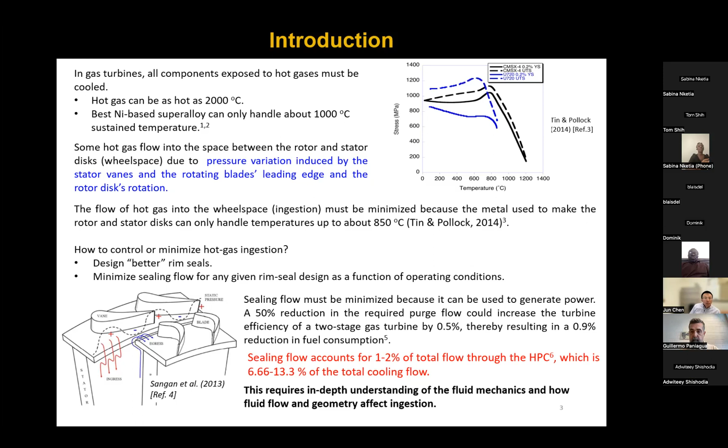To reduce sealing flow and also reduce hot gas ingestion, we need to be able to design better rim seals. That is the place where ingress occurs, the connection between the stator disk and the rotor disk. To design better rim seals, we need to understand the fluid mechanics and geometry, the flow mechanisms of how things go into the seal.

Ingress is induced by the rotor disk and its rotation, known as rotationally induced ingress, and by the pressure variation about the stator vane trailing edge, which is part of externally induced ingress, and also by oscillations in the stagnation pressure created by the rotating blades. Today I'll be talking about rotationally induced ingress and the pressure variation about the stator vane trailing edge, which is part of externally induced ingress.

For both rotationally induced ingress and externally induced ingress, a lot of experimental and computational work has been done, which I show in the Venn diagram.

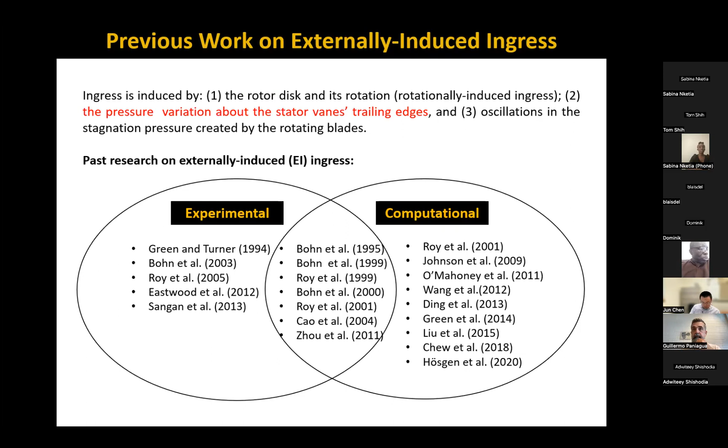From the literature review, several non-dimensional parameters were seen, but the most interesting ones are the non-dimensional sealing flow rate, CW, the Reynolds number in the annulus which depends on the annulus hydraulic diameter, the external Reynolds number which also depends on the radius of the hub R0, the rotational Reynolds number, and the ratio of the external Reynolds number to the rotational Reynolds number. All these parameters are varied to see how they affect the coefficient of pressure on the stator platform, known as CP, which has been said to be a predictor of ingress, and the sealing effectiveness, which is how well the seal prevents hot gas ingestion. There are some parameters I think are key here, but I'll talk about them later on.

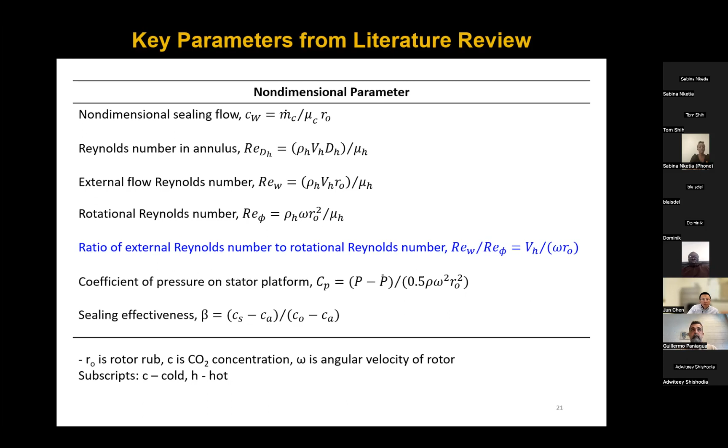So the following was noted from the literature: when REW, the ratio of the external Reynolds number to the rotational Reynolds number, is much less than 1, it means the flow is rotationally dominated, meaning the ingress is dominated by the rotation.

But when it's greater than or equal to 1, then it means that it is dominated by external influence, that's the stator vanes and other things that are not part of rotation.

So far, benchmark quality data has been generated that can be used to validate CFD. That is from Green et al. in Ohio State University, or from Sangan et al. at Bath. But they focused on generating high quality data and not so much on talking about the physics.

On IR ingress, Kelvin-Helmholtz instabilities has been identified by Rabs et al. in their 2009 study. However, how they occur and how they affect rotationally induced ingress was not explained. Also, alternating regions of high and low pressure have been identified by Green et al., but what causes these regions has never been identified.

On EI ingress, from the literature in Sangan et al., CP, or the coefficient of pressure, was deemed as the predictor of ingress, but we would want to verify this.

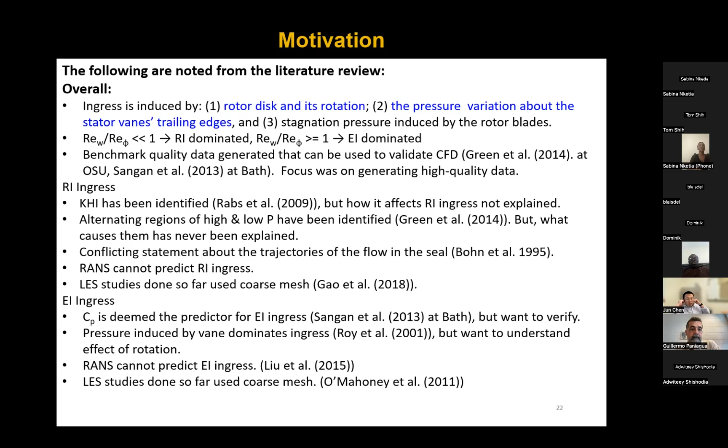Hence my objective is to examine the flow mechanism creating rotationally induced ingress in a Rotor-Stator configuration using wall-resolved LES. The approach would be to use a Rotor-Stator configuration without vanes and without blades.

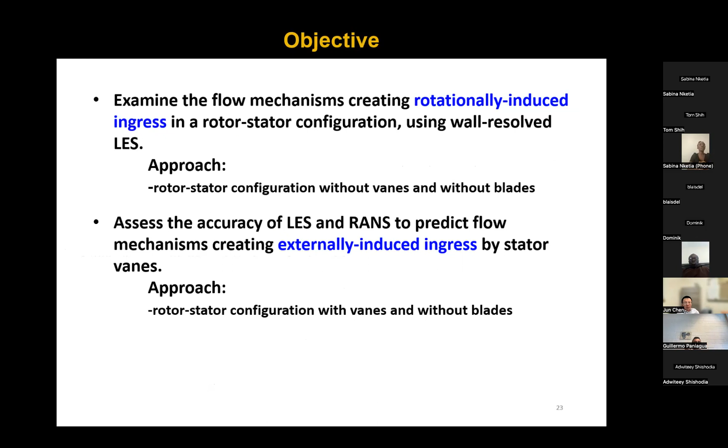The second objective is to assess the accuracy of LES and RANS to predict flow mechanisms creating externally induced ingress by stator vanes. Here, the approach would be to use a Rotor-Stator configuration with vanes and without blades.

So for my problem description, I'm going to, sorry, let me just move the chat somewhere.

So for my problem description, this is the configuration from the Aachen group, and this is the configuration studied for rotationally induced ingress. It has no vanes, and it has no blades.

Here we have the hot gas coming in at a hot temperature with a velocity profile, and it goes into this seal here, which is between the stator disc and the rotor disc. And then we have the outlet where there's a back pressure, and then we have an extension duct to prevent reverse flow.

And then at the bottom, we have the cooler flow coming into the seal at a cooler temperature. And then the red boundary is a rotor disc rotating at an RPM of 11,700 RPM, which is representative of aircraft engines.

Really. And so some of the key dimensions that I would like to note will be SC, which is the gap width, and also R0, which is the radius of the hub of the rotor disc, and also VH, which is the velocity coming into the annulus of the hot gas, and S, and DC. These are some of the key dimensions that I'm going to talk about.

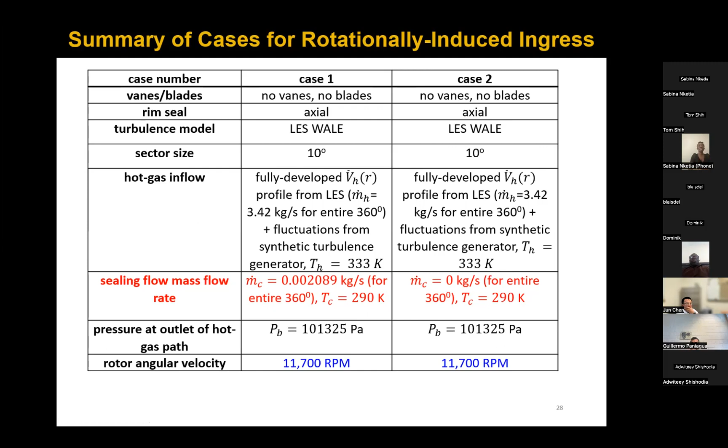Now, these are some of the interesting non-dimensional parameters that were obtained. So for the first case, the non-dimensional sealing flow rate is 1,000, and the second one is 0. So that's why I wrote 1,000 over 0, but they are not divided, it's just 1,000 or 0.

And then I have the annulus Reynolds number, the external flow Reynolds number, and the rotational Reynolds number, and then the ratio of the external flow Reynolds number to the rotational flow Reynolds number, which I highlighted, is 0.41, much less than 1. So rotation is very dominant here.

The second configuration, which meets the second objective, is from the Bath configuration, which has 32 vanes, but I'm using 2 vanes here, and 2 vane passages. Again, we have the hot gas flow coming at a temperature, and then the cold gas flow. And then we have our rotor disc, extension duct with the back pressure, and the green here are my stator vanes. And then I have my SC.

But note here that the rotor disc is a step below the stator disc, so I put an inset here, and it's also inclined at an angle. So it's not the usual 90-degree inclination that we know, it's just at an angle, with a bit of a step below the stator disc. I'll talk about the importance of this later on.

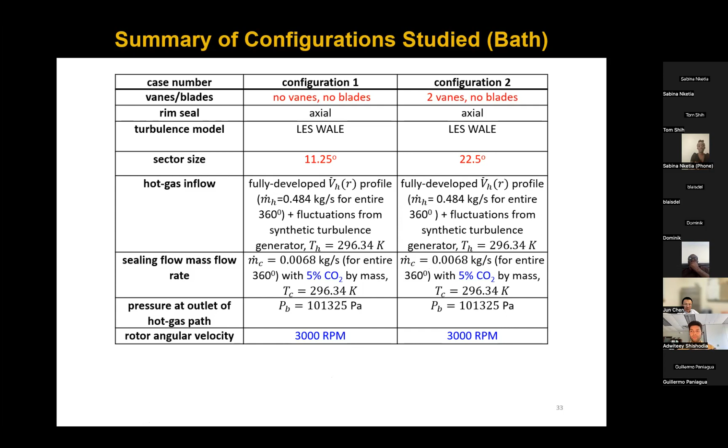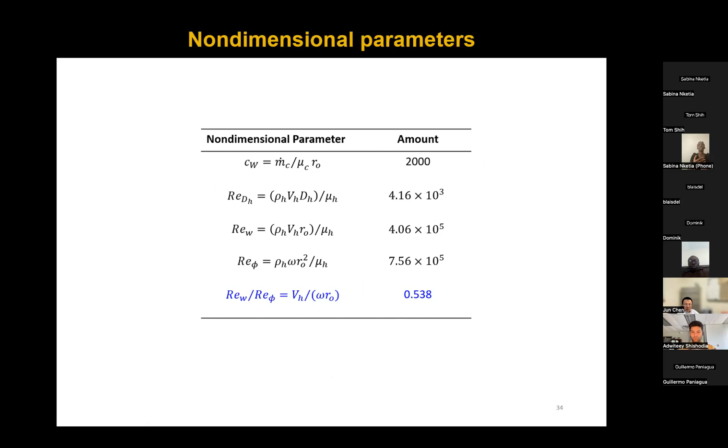Note here that the rotor angular velocity is 3,000 RPM, which is representative of land-based gas turbines. Again, I show the non-dimensional parameters that are interesting in this flow: CW, REDH, REW, RE phi, and here REW over RE phi is 0.538. This was what the experimentalists prescribed as the desired operating point for this configuration.

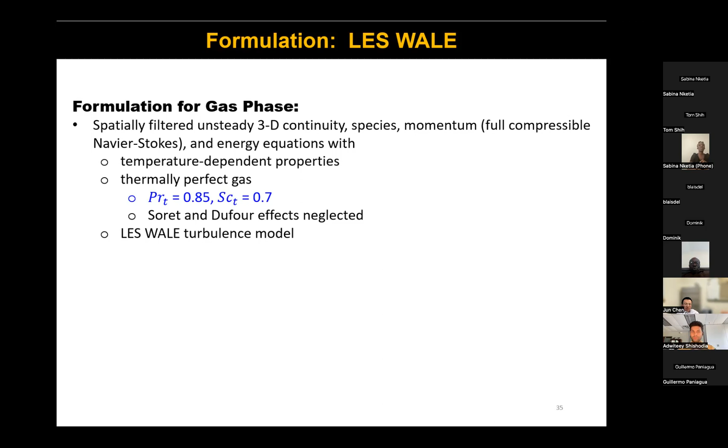So now I talk about my formulation. For my LES formulation, I'm using the spatially filtered and unsteady 3D continuity, species and momentum, full compressible Navier-Stokes and energy equations with temperature-dependent properties, thermally perfect gas, where the turbulent Prandtl number is 0.85 and turbulent Schmidt number is 0.7. I neglected the Soret and Dufour effects, and I'm using the LES wall-adapted local eddy viscosity turbulence model.

For rotationally induced ingress, that's the Aachen configuration. The fully developed velocity profile was obtained from LES, where I ran a very long duct as a translationally periodic duct, found the mean velocity profile, and then ran another duct to see how long it needed to be to get that same fully developed flow using the mean plus the specified synthetic turbulence.

I have the sealing flow rate, the pressure at the annulus outlet, and the rotor disc angular velocity. Now, for the externally induced ingress case, again fully developed flow from LES. However, there they gave us a really long duct, so we were able to run it to get the fully developed flow we needed. Again, I have my sealing flow, mass flow rate with 5% carbon dioxide by mass to offset the density difference between the hot gas path and the cold gas path, and my back pressure and rotor disc angular velocity of 3,000 RPM.

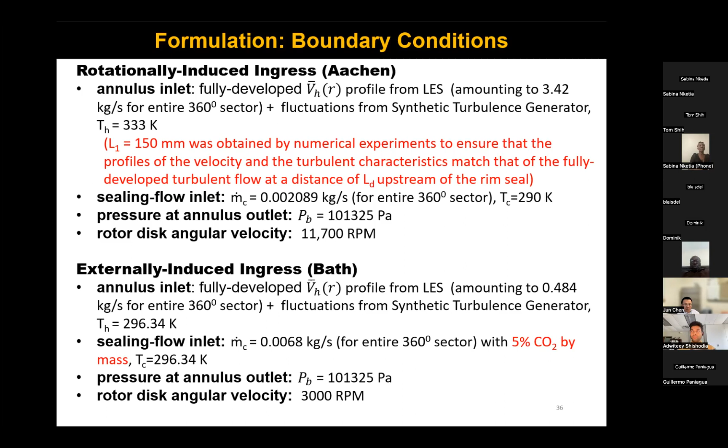Here for RANS, even though the study is mainly about LES, I used RANS as my initial condition to start the LES. So I ran some RANS, and I also did some comparison with RANS, that's the Reynolds averaged Navier-Stokes equation. The formulation uses the Reynolds averaged 3D continuity, species and momentum, and energy equations with temperature-dependent properties, thermally perfect gas, a turbulent Prandtl number of 0.85 and a turbulent Schmidt number of 0.7. Again, I neglected the Soret and Dufour effects, and I'm using the shear stress transport model.

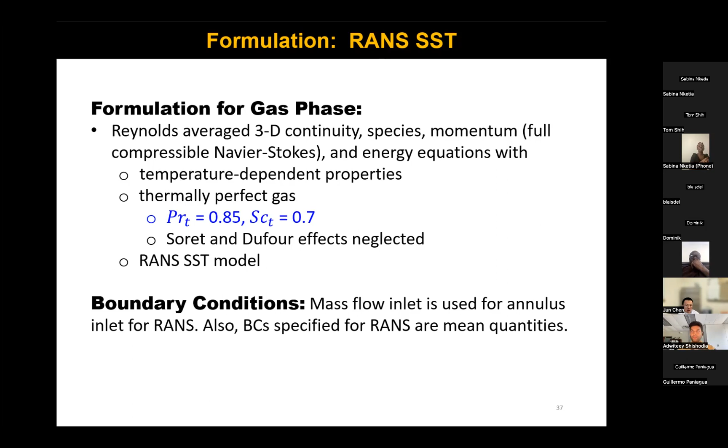For the RANS simulations, I used a mass flow inlet for the annulus, not a velocity profile, and all the boundary conditions specified are mean quantities.

For my solution method, the code I used was ANSYS Fluent version 22.1. The algorithm for rotationally induced ingress, when there are no vanes and no blades, used a simple scheme. For my time derivative, I used a bounded second order implicit scheme, and for spatial derivatives, I used Presto for pressure interpolation and second order central for all advection and diffusion terms.

For externally induced ingress, when there are vanes, I used the coupled scheme, the bounded second order implicit scheme, and then the second order central scheme for all advection and diffusion terms.

For my time step size and grid, I'll give more details in the verification and validation section. However, I used 10 to the power minus 6 and 10 to the power minus 5 for my time step sensitivity. For all my grids, I made sure the y-plus at the first grid point next to the wall was less than 1, and there were at least 5 grid points within y-plus of 5.

At the end of each time step, the residual for continuity was less than 10 to the power minus 6. For momentum, it was less than 10 to the power minus 7. For energy, it was less than 10 to the power minus 8. And when there was carbon dioxide, it was less than 10 to the power minus 8 for the CO2 concentration.

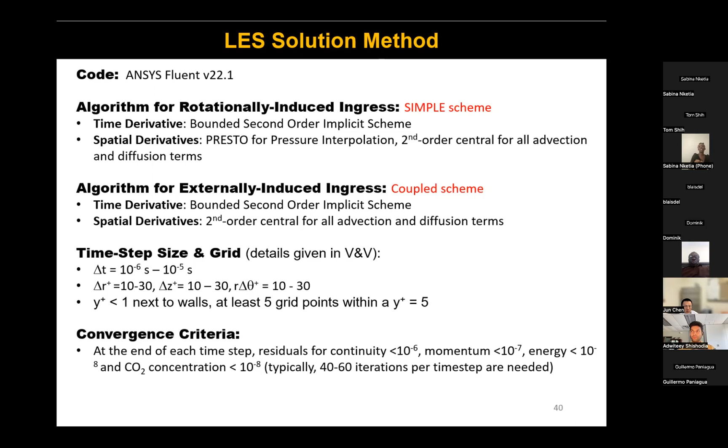Typically, for these configurations that I've shown, about 40 to 60 iterations per time step were needed for convergence.

For my runs, I used ANSYS Fluent version 22.1. I used the coupled scheme, and then the second order central scheme for all advection and diffusion terms. Again, my grid size met these same criteria.

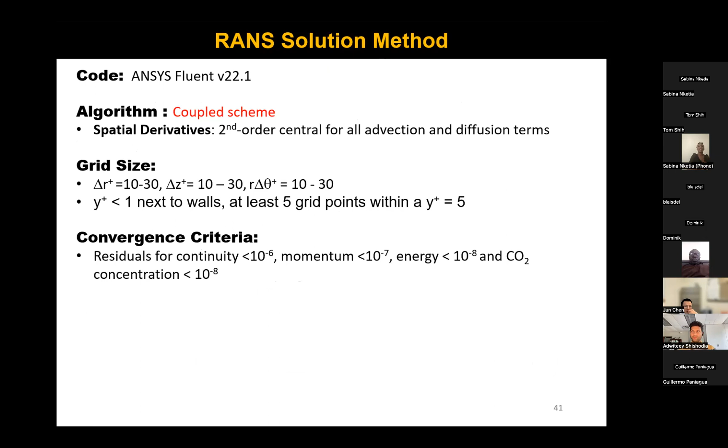For convergence, the residual for continuity was less than 10 to the power minus 6. For momentum, 10 to the power minus 7. For energy, 10 to the power minus 8. And CO2 concentration, 10 to the power minus 8 as well.

So I move over now to the verification and validation section, where I make sure I'm solving the correct equations, and also that I match with experimental data - that is validation. I'm going to talk about 3 cases.

The first case is an annular duct, because all my rim seal configurations start with an annulus or annular section. The second is an annular duct with a rim seal with no vanes and no blades, representative of the Aachen configuration for rotationally induced ingress. The third case is a rim seal with stator vanes but no rotor blades, representative of the Bath configuration.

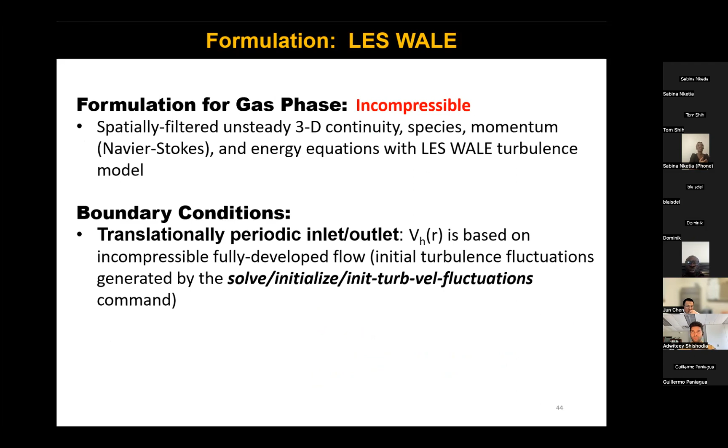For this formulation, I'm running it as an incompressible duct, spatially filtered and unsteady 3D continuity, species and momentum, Navier-Stokes and energy equations with the LES wall-adapting turbulence model. The velocity is based on incompressible fully developed flow. I generated initial turbulent fluctuations using this command in ANSYS Fluent.

I used a simple scheme, and for the time derivative, the bounded second order implicit scheme, along with the Presto scheme for pressure interpolation, and second order central for all advection and diffusion terms.

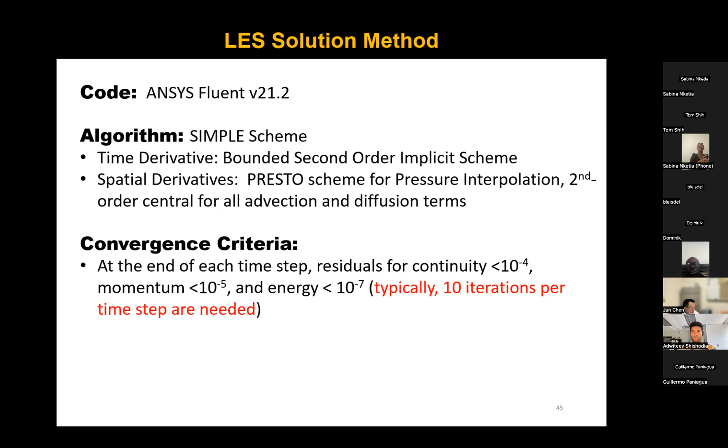At the end of each time step, residuals for continuity were less than 10 to the power minus 4, for momentum less than 10 to the power minus 5, and for energy less than 10 to the power minus 7. Typically, about 10 iterations per time step were needed for convergence in this simulation.

When using a sector size rather than the full annulus, the sector size needed for LES should be big enough to contain the flow structures. This required sector size depends on the curvature parameter gamma. If gamma is much less than 1, the effects of curvature can be neglected and the flow can be treated as planar flow. In this particular flow, gamma is about 0.5.

For planar flows, Kim et al. in their 1987 study recommended a spanwise dimension of 3.2 times the gap height, which is equal to about 90 degrees for this problem.

However, a 2-point correlation in the span-wise direction for this same problem by Quadrio and Luchini goes to zero at about a quarter of that span-wise direction. But I decided to use 120 degrees to see how well this fits in, how well it will perform as compared to what was shown in literature.

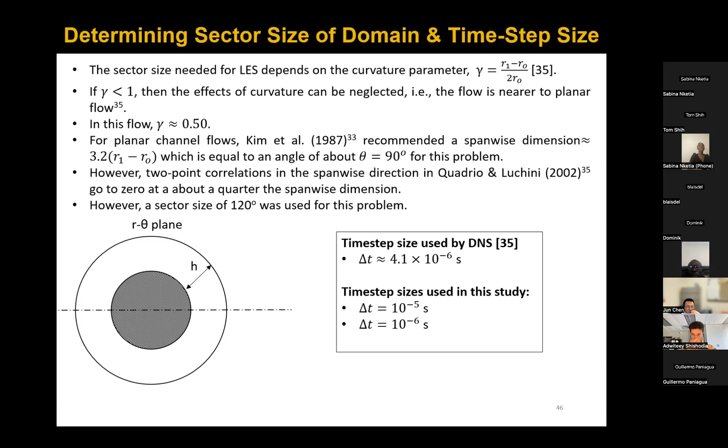The time step size for this problem prescribed by the DNS study was 4.1 times 10 to the power minus 6. However, I did a time step sensitivity study with two time step sizes, 10 to the power minus 5 seconds and 10 to the power minus 6 seconds, to see which one works well. I will show the results later.

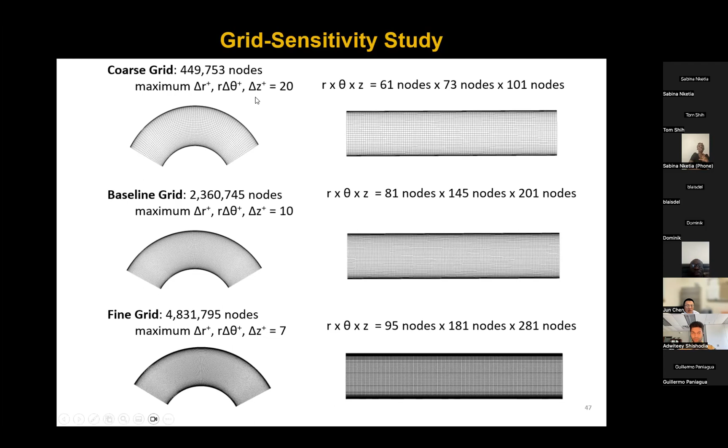For this problem, I had 3 grids: a coarse grid, a baseline grid, and a refined grid. All these grids met certain criteria: the Y plus of the first grid point off the wall being less than 1, and maximum delta R plus, R delta theta plus, and delta Z plus values.

So I'm going to talk about the Celik criteria here. The Celik criterion shows that the LES IQ for each grid that is used must be greater than 0.8, which means that every grid used for LES must be able to resolve more than 80% of the turbulent kinetic energy.

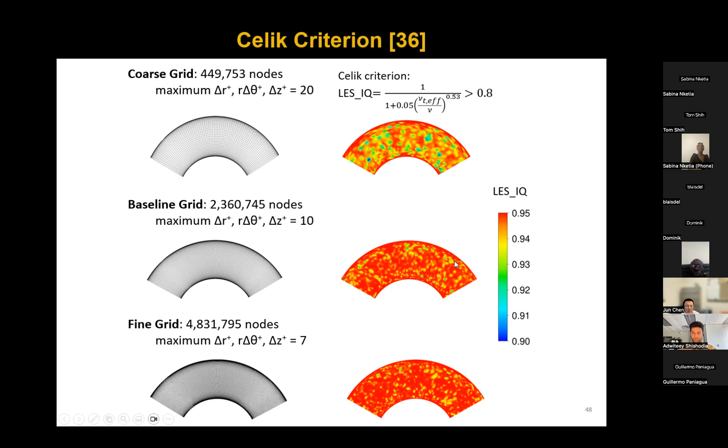So I show the grid sensitivity study for the time step size of 10 to the power minus 6 seconds, because I did a time step sensitivity study, which I won't show here but do show in my thesis, that 10 to the power minus 6 seconds performs way better than 10 to the power minus 5 seconds.

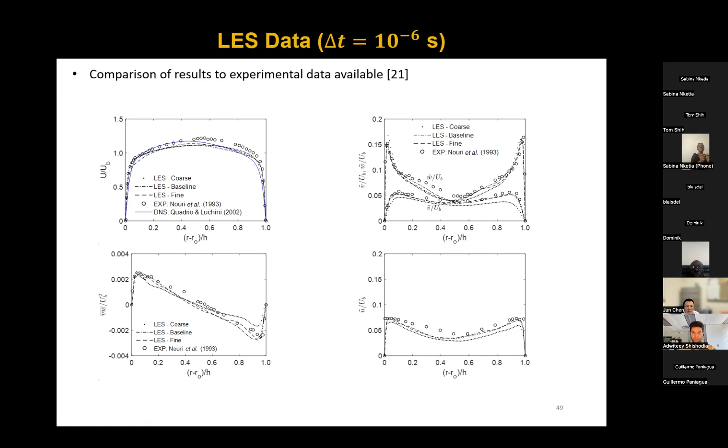Here I show LES coarse, LES baseline, and LES refined. From here, the coarse grid doesn't perform so well based on these plots, but the baseline and refined grids are in very close agreement. So we decided that the grid density for the baseline grid was sufficient for this study.

Then also the baseline grid was tested to see if it was sufficient. To test it, we need to look at the energy spectra.

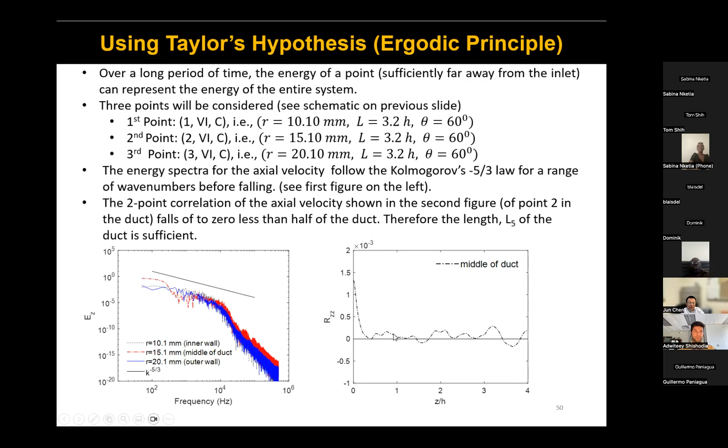Then again, I plotted the 2-point longitudinal correlation to see if the duct length that I used, L5, was sufficient. It becomes uncorrelated real fast, much earlier, which shows that the length of the duct used is sufficient.

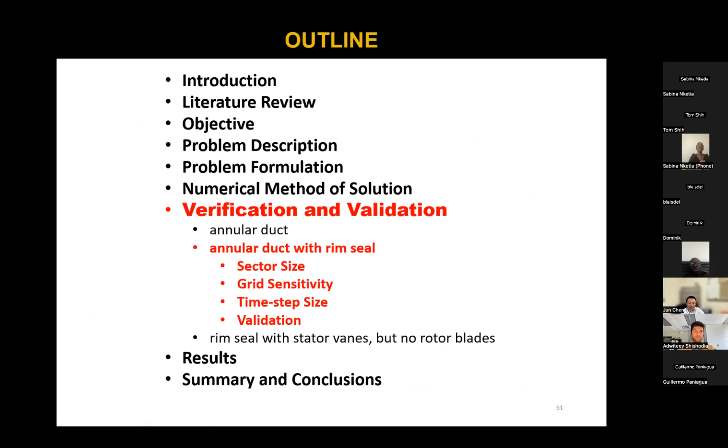So I'm going to move to my next case for verification and validation, which is my annular duct with the rim seal. I'm going to talk about the sector size, the grid sensitivity study, and then do a time step size analysis, and give some validation.

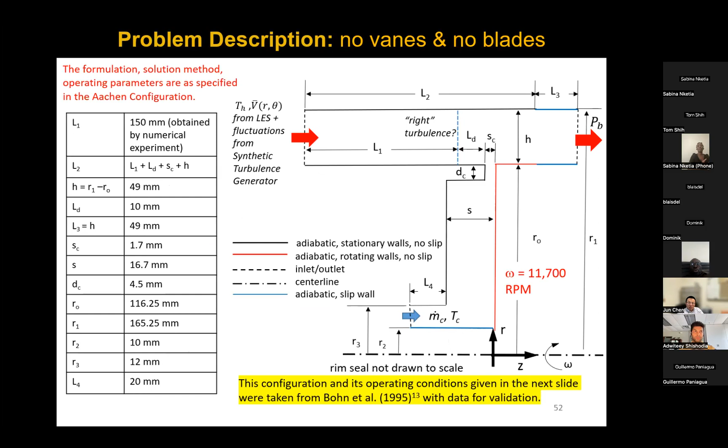So I remind you again of the problem description with no vanes and no blades from the Aachen group. I already talked about the formulation and solution method for this earlier. So I'm going to talk about the sector size analysis with RANS, that's Reynolds Averaged Navier-Stokes equations.

So I ran this case for 3 different sector sizes, 10 degrees, 20 degrees, and 30 degrees, to see what changes as you increase the sector size.

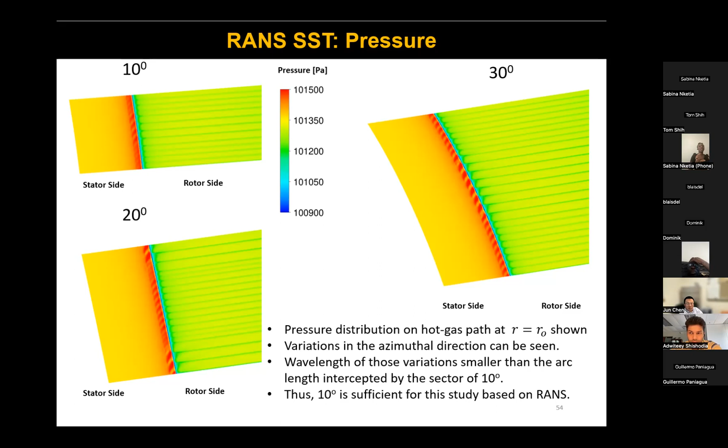So based on RANS alone, 10 degrees is sufficient for this particular case. But then I also have to use LES to confirm or verify what RANS told me.

With LES, I estimated the azimuthal 2-point correlation at 2 points, one very close to the rotor disk, which is rotating at 11,700 RPM, and another one a little bit above. I plotted a 2-point azimuthal correlation to see if they become uncorrelated, which would mean the sector size is big enough.

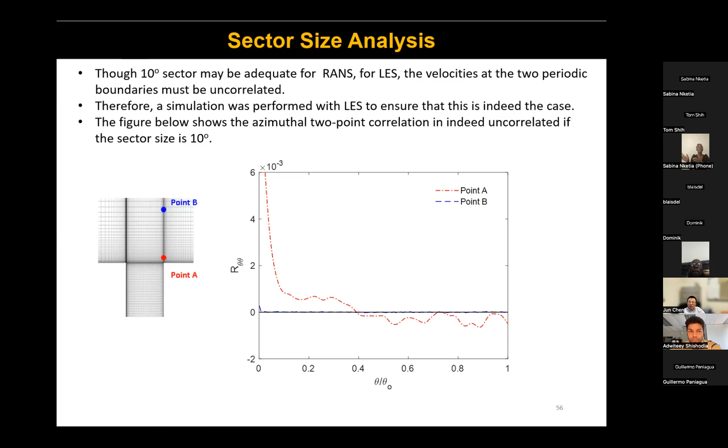Now, this is just for the mass flow rates and then the RPMs specified. If we use different parameters, we'll have to calculate a different sector size. So if parameters change, you have to do a different set of calculations to get a sufficient sector size that you will need.

I'm going to talk about a grid sensitivity study. For my grid sensitivity study, I have a coarse grid, a baseline grid, and a fine grid. The coarse grid is really clustered at the walls, but it spreads out quickly toward the center of the seal. The baseline grid has more grid points, but they are evenly spread out. The very fine grid has more grid points in the azimuthal direction in the seal region.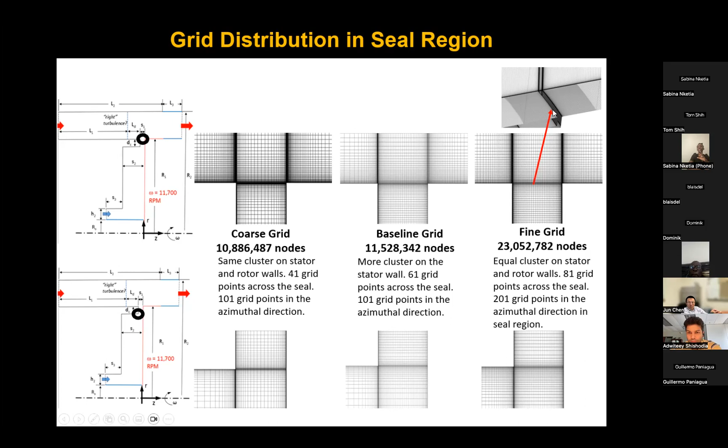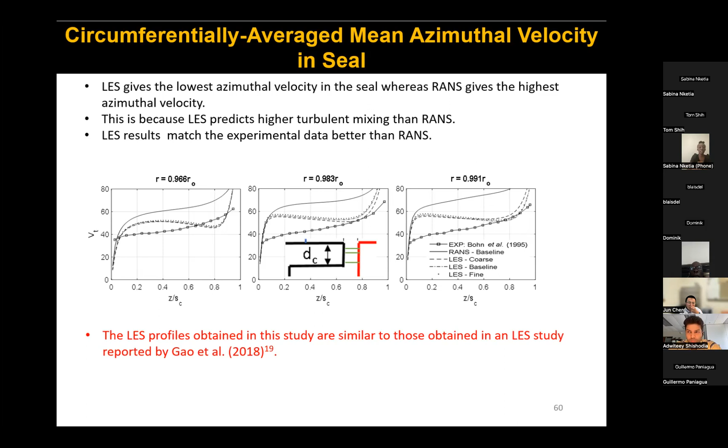Now we come to the radial velocity in the seal. Again RANS is the solid line, LES is the dashed line, and the experimental data is the one with rectangles. Here it seems that RANS performs better than LES, because LES shows much higher magnitudes than RANS for the radial velocity. On the far right, very close to the seal where ingress and egress occurs, LES shows an inward radial velocity close to the rotor disk, which shows that rotationally induced ingress occurs on the rotor side of the seal. Bohn et al. in their 1995 study experimentally observed ingress on the rotor side too, although it was not measured for the case without rotor blades and without stator vanes. Again, the LES profiles obtained in this study are similar to those obtained in the study reported by Gao et al. in their 2018 study.

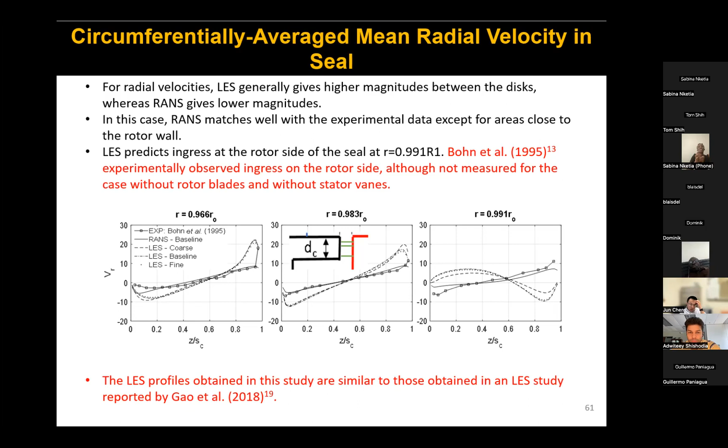I'm going to talk about why it seems that for the radial velocity, RANS seems to do better than LES, and see what we were or were not doing right compared to the experimental data. For the experimental setup, we assumed that a fully developed turbulent flow was used. So all the cases we ran previously, the results I showed, assumed a fully developed turbulent profile. However, because the radial velocity results weren't matching, we decided to try a different inlet configuration to see what happens when things change.

So we checked another inlet configuration with a fully developed mean profile but with turbulence intensity of 0%, and another one for LES with uniform flow at the inlet and turbulence intensity of 0%. This is because if the flow is a fully developed profile without turbulence intensity, after a while it approaches a laminar profile and the boundary layer becomes thicker. LES is very sensitive to the inlet profile and boundary layer thickness. The bottom left plot shows that when the turbulence intensity is 0, the data matches very well with the experimental data, whether it's azimuthal velocity or radial velocity.

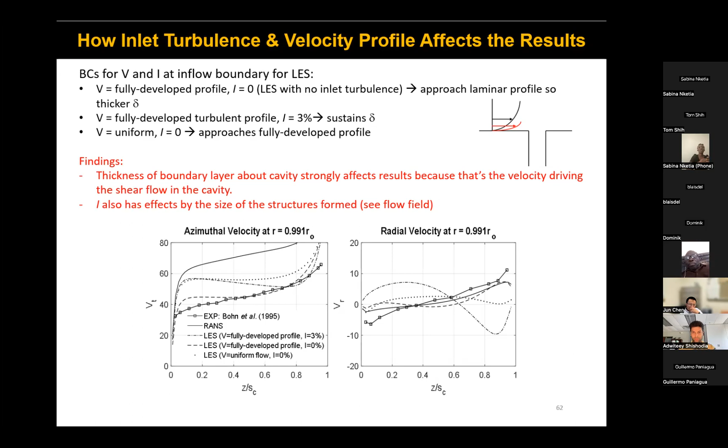However, if it's a uniform flow and the turbulence intensity is 0%, with time it approaches the fully developed turbulent flow with a turbulence intensity specified. This means the flow given in the experiment was not a fully developed turbulent flow with as much turbulence as we had assumed. Hence the reason why our data wasn't matching the experimental data for the radial velocity. For azimuthal and radial, if it's fully developed without turbulence intensity, it matches pretty well.

Again, I ran another case with no turbulence intensity to see how it compares to when there was inlet turbulence, which is our case that we are interested in. You can see that with turbulence, many small structures are formed, which is shown from the spectral analysis or the frequency plot. Without turbulence, only a few large structures are formed.

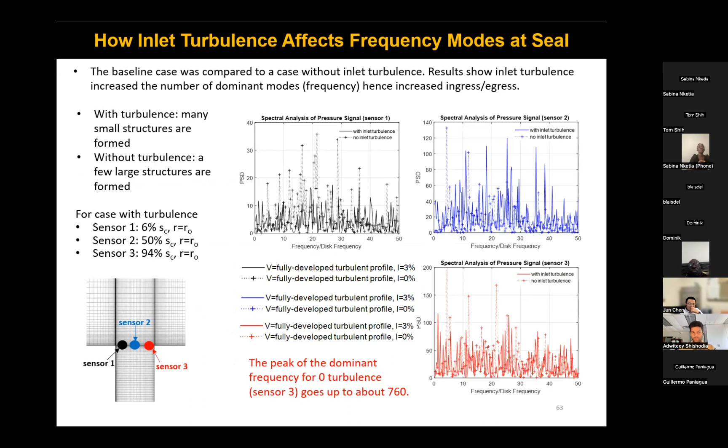I'm going to show another pictorial plot, which shows the top three r-theta planes in the seal, one close to the stator side, another close to the rotor side, and one in the middle. The top one is when there's turbulence, a fully developed turbulent inlet with a turbulence intensity, and the bottom one is fully developed profile with zero turbulence intensity. There are very large structures from the bottom one, but only a few of them. For the top one, there are many small structures formed.

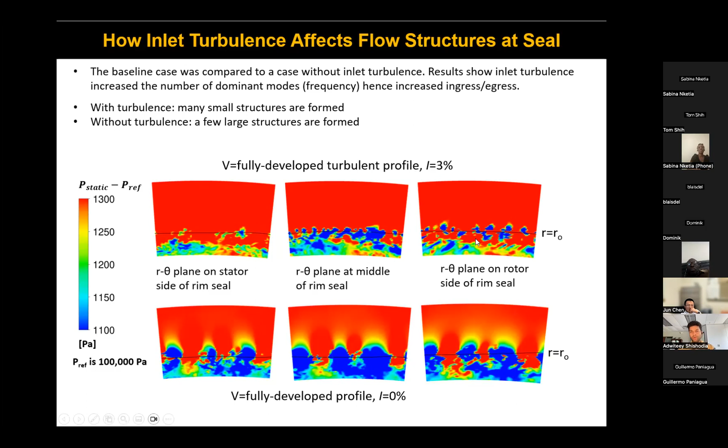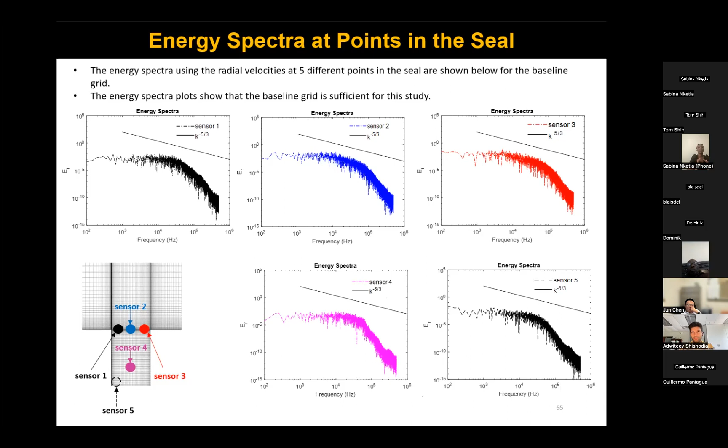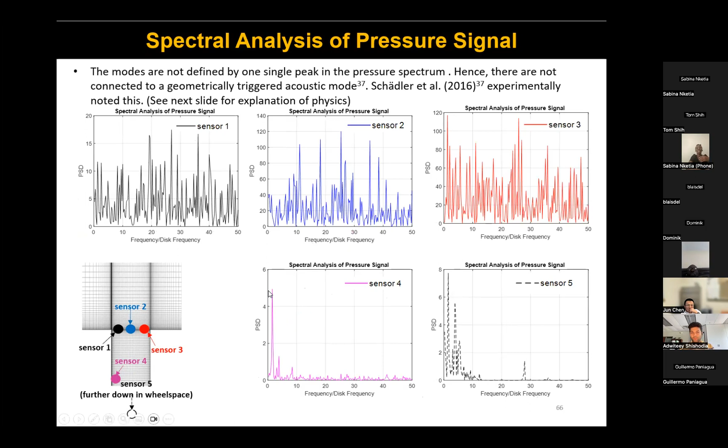These peaks are associated with Kelvin-Helmholtz instabilities and vortex shedding in the seal region, because for sensor 4, which is at the bottom, and sensor 5, further down in the wheel space, where there are no Kelvin-Helmholtz instabilities and vortex shedding, there isn't a lot of energy.

The third case I'm going to talk about is my rim seal with stator vanes but no rotor blades. Again, I remind you of the configuration from the University of Bath, with vanes and no blades.

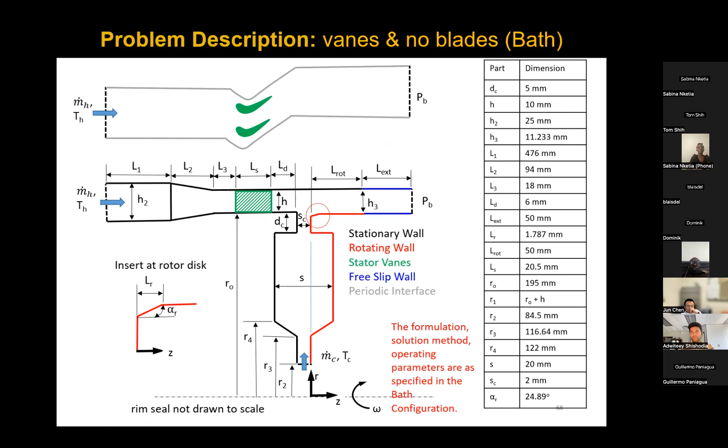The knowledge built from previous verification and validation studies was used to build this grid, generating it based on the velocities in the flow and the flow parameters given. It was ensured that the y-plus of the first grid point at the walls, as usual, was less than 1, with at least 5 cells within a y-plus of 5. The delta r-plus, delta z-plus, and r-delta-theta-plus were all less than 20 for this grid build. On the left-hand side, I show the grid when I take out the vane.

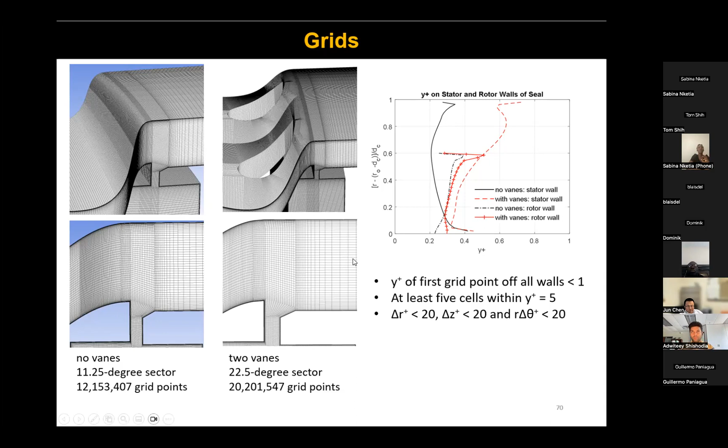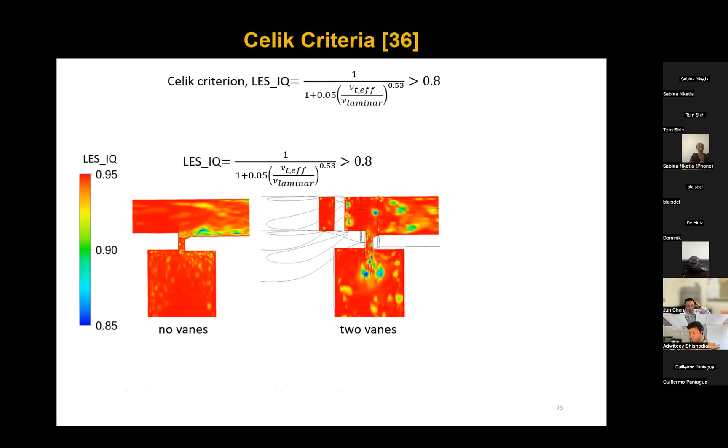In the middle, the second set of grids shows the grid generated when there are vanes. Here I show the Celik criteria, which requires the LES IQ to be greater than 0.8. Both grids met this criteria. I'm also using the Kolmogorov scale again to see the time scale needed to resolve the seal.

I show the picture with the configuration without vanes as well, to see what changes when you take out the vanes, and what you need to resolve the flow. With no vanes, for this same configuration, you need just about 10 to the power minus 5 seconds to resolve the flow at small scales in the seal. However, when there are vanes, near the trailing edge and very close to the seal, you need at least 10 to the power minus 6 to resolve the small scales there.

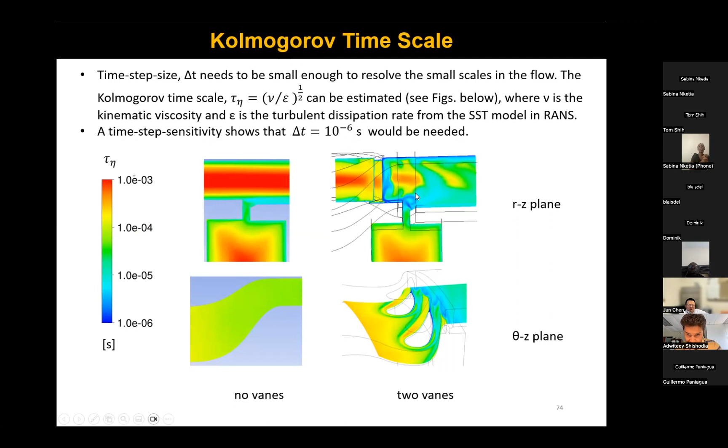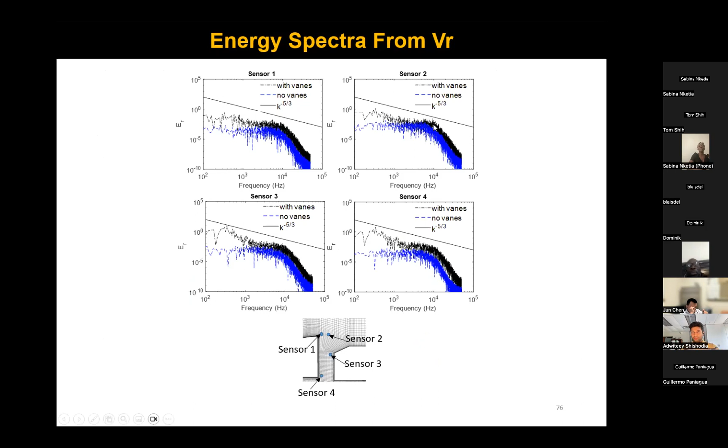Again, I showed the energy spectra from the radial velocity for the two configurations, demonstrating that the grid I'm using is sufficient for the study, because they follow the Kolmogorov -5/3 law before falling drastically.

So on validation, I'm going to show the sealing effectiveness for the configuration with vanes, with 2 vanes, for RANS and LES as compared to experimental data.

But for RANS, it predicts no ingress, so it predicts a perfect seal. It shows that everything is perfect, but in actual sense, there's ingress. So LES is able to predict ingress, but RANS is not.

Surprisingly, even though RANS is not able to predict ingress as compared to LES, RANS predicts comparable CP values for different points in the seal region. Point A is 2.5 millimeters away from the stator vane trailing edge, and point B is on the outer casing in the annulus, in the middle of the seal.

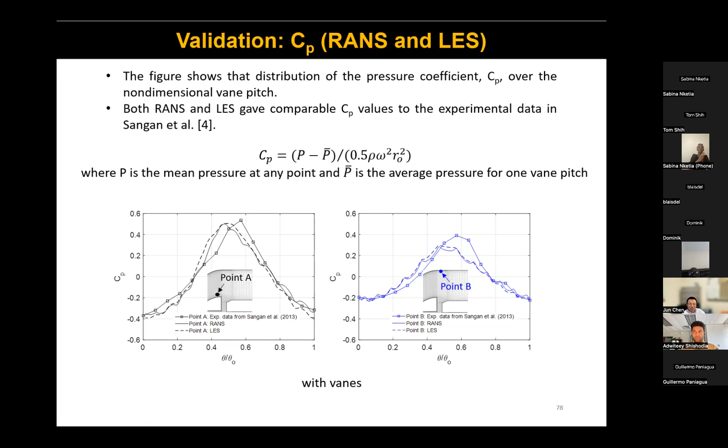As compared to experimental data, RANS and LES predict very comparable CP. So CP has been touted in the literature as a predictor of ingress. We will need to verify this, and see why, even though RANS and LES predict CP on an equal level, RANS is not able to predict ingress.

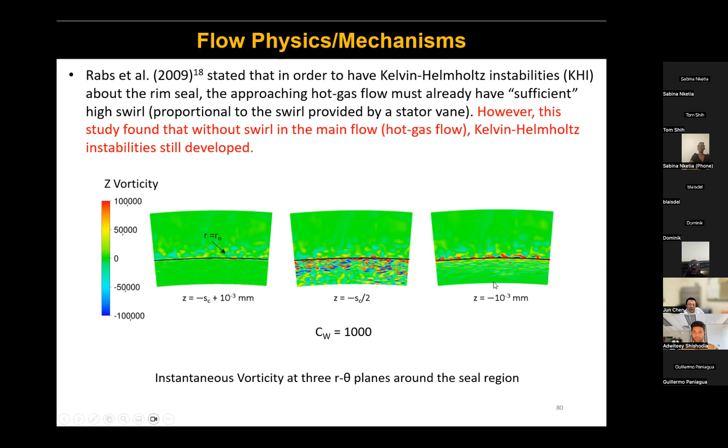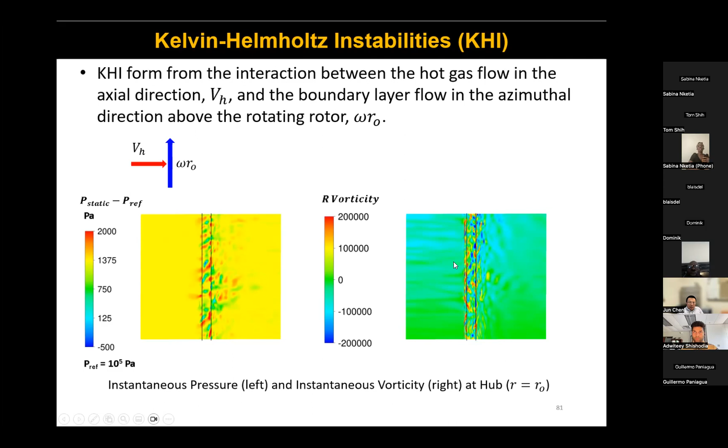I show a lot of it on the right-hand side, in the far right, a picture that is very close to the rotor disk, and then more plots here. Kelvin-Helmholtz instabilities form from the interaction between the hot gas flow in the axial direction, shown with the red arrow, VH, and the boundary layer flow in the azimuthal direction above the rotating rotor, that is omega R0. This shows the instantaneous pressure and instantaneous vorticity, which shows that there's a lot of Kelvin-Helmholtz instabilities that form.

Another phenomenon that is seen is vortex shedding, where a vortex is shed very close to the edge of the stator disk, and then it travels along the shear layer, and it impinges on the rotor disk. Once it impinges, the cycle starts all over again.

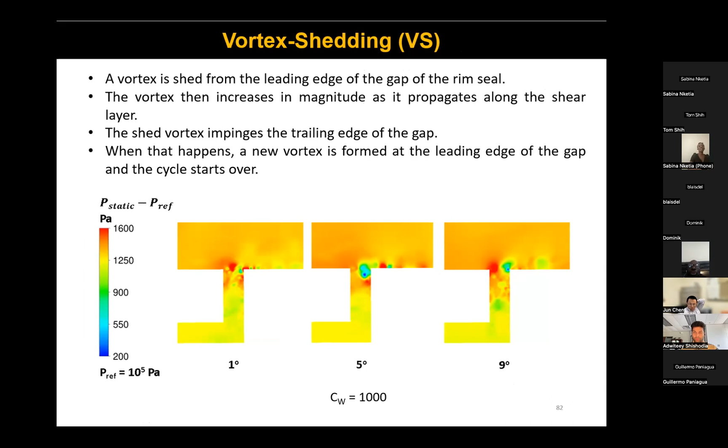This is also an instantaneous pressure plot. The alternating regions of high and low pressure about the rotor surface are created by the Kelvin-Helmholtz instabilities and the vortex shedding. These high and low pressure regions are statistically stationary and do not rotate with the rotor wall.

On the bottom left, I show the mean pressure plot with LES and then RANS, with sealing flow and without sealing flow. We can show that the LES shows a lot of dynamics in the seal.

On the right-hand side, I show the time-averaged pressure from LES for when there's sealing flow and when there's no sealing flow. You see that there's a lot of dynamics in the seal, and also when there's sealing flow, the pressure is higher in the seal.

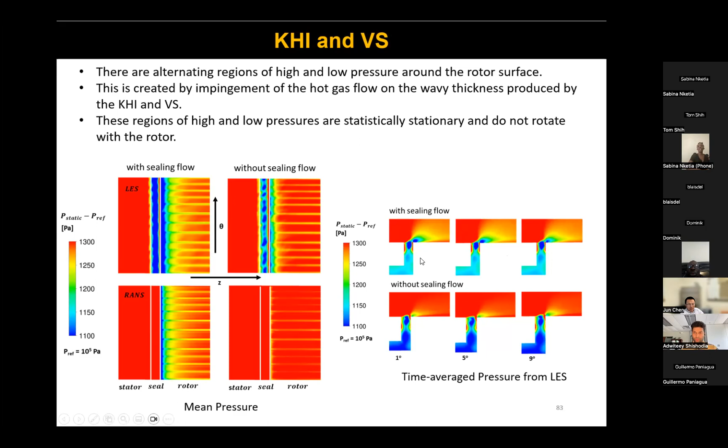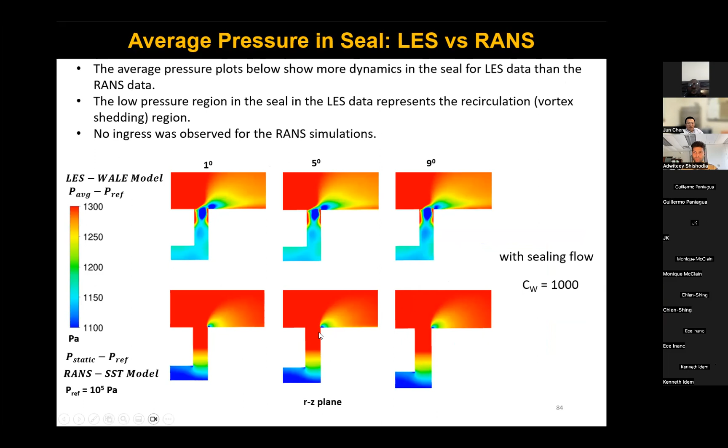The seal is pressurized. I show another plot comparing LES to RANS mean pressure, and you can see that with RANS, there's not so much going on in the seal, hence the perfect sealing shown. There's no ingress observed for the RANS simulations.

The alternating regions of high and low pressures cause the ingress to start on the rotor side of the seal, and then it gets entrained by the shed vortices, and then it goes in through the stator side.

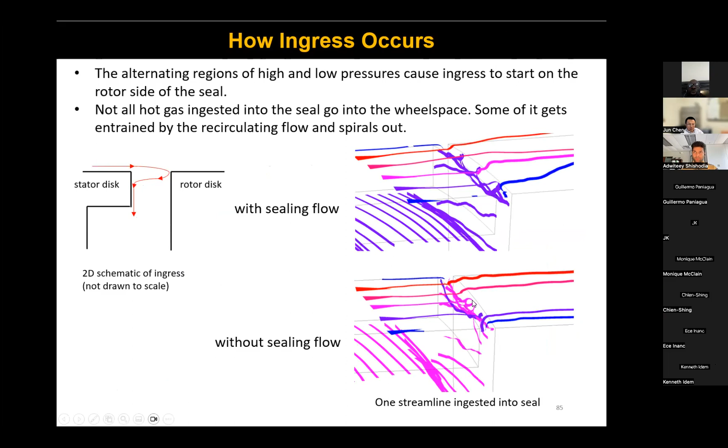Now, it is important to know that not all the hot gas that goes into the seal is ingested into the wheel space. Some of it spirals out and then still goes out of the seal.

On egress, it starts on the rotor side because of the disc pumping action of the seal, and then it gets entrained by the shed vortices, and then it gets out of the stator disc. This is for rotationally induced ingress.

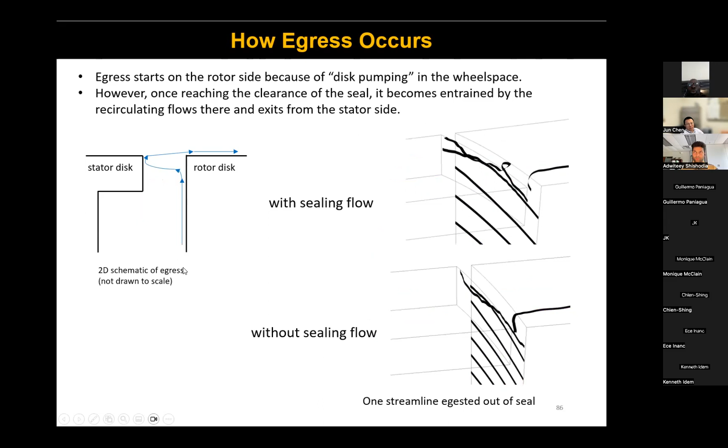I show three trajectories for ingress: for one trajectory, the flow flows off and then flows out on top of the seal. For another trajectory, the flow recirculates in the seal and then gets out. For another trajectory, it recirculates and then gets ingested into the wheel space.

On egress, some of the flow comes out through the disc pumping and then gets entrained and then goes out of the seal, or it gets recirculated back into the wheel space.

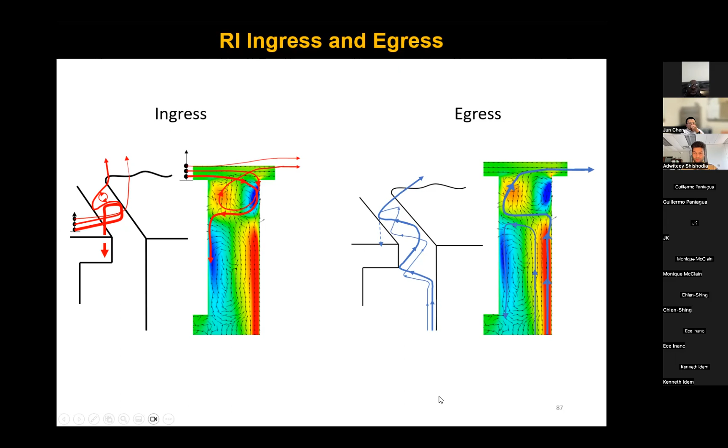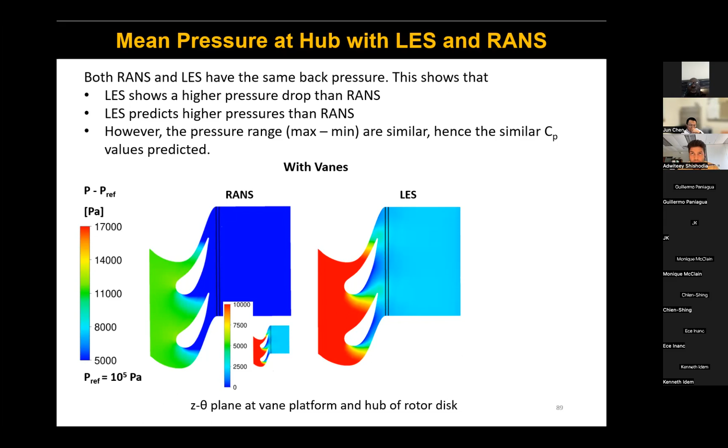I put in an insert here to show that when traversing a vane pitch, the pressure range, maximum minus minimum, is similar across a vane pitch, hence the similar CP values predicted. So across the vane pitch, the maximum minus minimum pressure is equal, but RANS generally predicts lower pressure than LES. Hence they are similar CP.

Now I'm showing the mean pressure at 3 r-z planes in the seal for the configuration with vanes, over about 1 vane pitch. I didn't put the RANS here, but I'll flip between these two plots. In the wheelspace you have about 6,500 to 8,000 pressure for LES, and for RANS, in the wheelspace, you have about 2,000 to 2,500. So LES predicts a higher pressure drop from the annulus into the wheelspace, hence the ability to push flow into the seal as compared to RANS, hence the ability to observe ingress.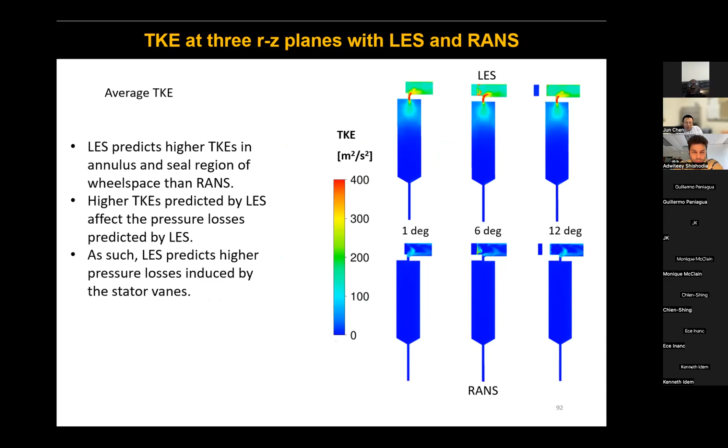Here I show the mean radial velocity in the middle plane in the seal for both RANS and LES. You can see that the number of highs, the magnitude of the radial velocity, be it outward radial velocity or inward radial velocity, are similar for both RANS and LES. However, due to the difference in the pressure drop across the seal from annulus to wheelspace, LES is able to predict more ingress, or actually predict ingress in the seal region, where RANS is not able to. That is beneath R equal to R naught, where the hub of the rotor disc is.

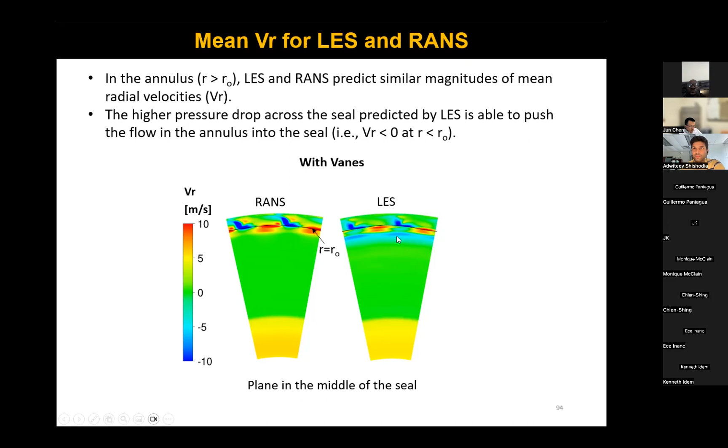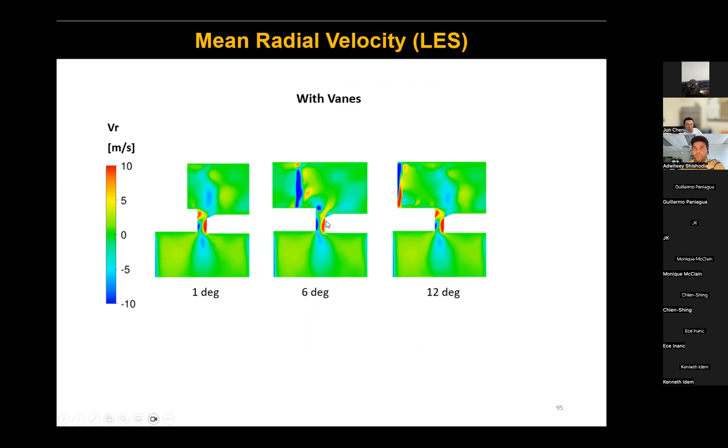So the number of highs and lows correspond to the number of stator vanes that you have. Now I'm using two stator vane passages, so I see 2 highs and 2 lows. However, LES is able to predict ingress where RANS is not able to. This is just a brief picture with mean radial velocity in other planes, to show that there's ingress here going into the seal. I show the same for RANS, but in the seal, RANS doesn't predict any ingress.

Here I show the rate of work per unit area on rotor walls. On the rotor walls very close to the seal, that is around Z equal to 0, there's a lot of work output that corresponds to the number of stator vanes. However, away from that, there's no work, and the work predicted by LES is much lower than the work predicted by RANS, but very close to the seal, LES shows a higher work output.

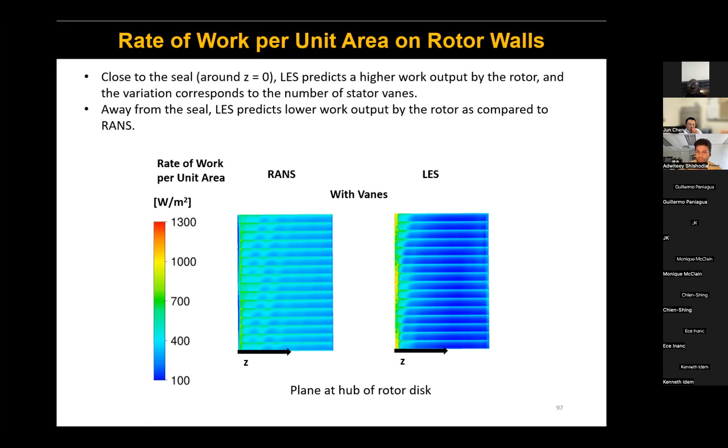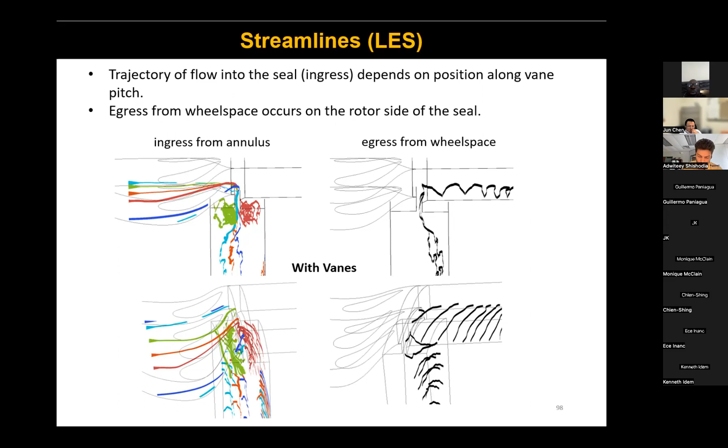Now, the trajectory of flow into the seal depends on the position along the vane pitch. For ingress, when there are stator vanes, where the flow goes into depends on where on the vane pitch it originated from. The flow can either go into the seal and go straight down, or it goes in and then gets swirled onto the left, or gets swirled onto the right, depending on where it originated from. For egress, it starts on the rotor side due to the disc pumping action, and then it gets out from the rotor side.

Now I'm going to show for the back configuration, no vane versus vane, to see how if you take vanes out, what happens, or how the vane influences the flow. So first of all, I show the first two. On the left, I show no vanes for RANS and LES, and then on the right, I show with vanes for RANS and LES.

When there are no vanes, you can see that even LES does not predict any ingress. It shows a perfect seal. But when there are vanes, LES is able to predict the ingress accurately.

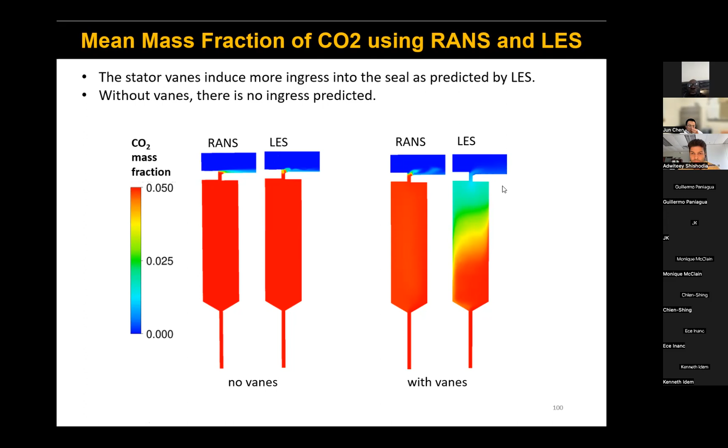This is the mean pressure in the middle of the seal, the plane in the middle of the seal. On the left-hand side for no vane, on the right-hand side for the configuration with vanes, but on top two are for LES, and then the bottom two is for RANS. You see that without vanes, the pressure drop across the seal from annulus into the wheelspace is much lower. Although for the LES one, we do see some Kelvin-Helmholtz instabilities here.

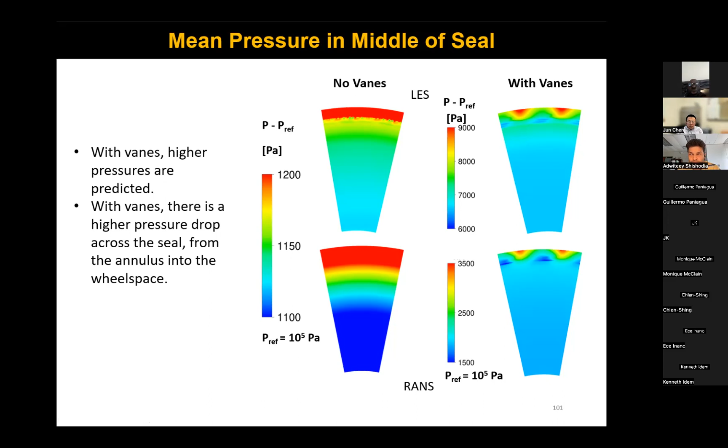Also the pressure magnitude predicted when there are no vanes is much lower than the pressure magnitude predicted when there are vanes, which means that the vanes also induce a higher pressure drop. And then also with vanes, the pressure difference in the annulus and the seal region depends on the position along the pitch. But here, without vanes, we see some vortex shedding in the seal region.

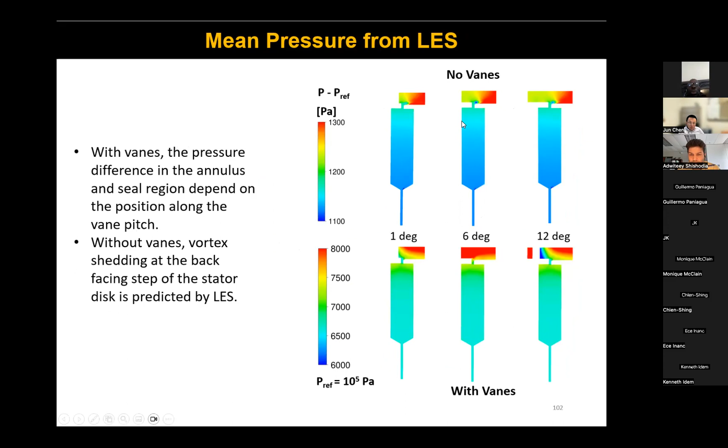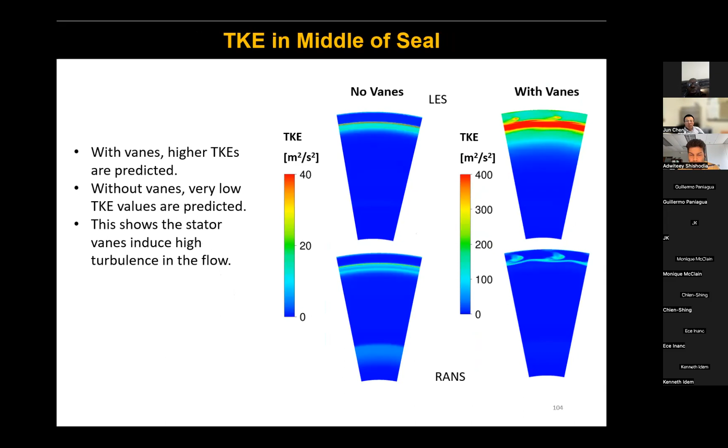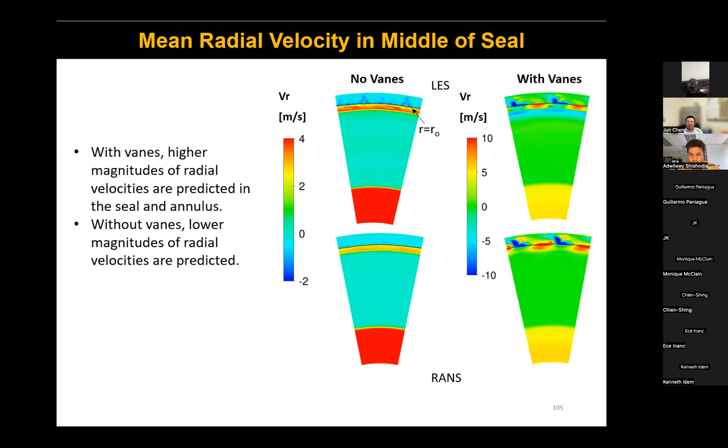And then again, for mean radial velocity, when there are no vanes, you see that the magnitude of the radial velocity is much lower as compared to the configuration with vanes, both for LES and for RANS. So in summary, the following conclusions were made for the rotor-stator configuration without vanes and without blades, based on this LES study.

It shows that the interaction between the hot gas flow in the axial direction and the azimuthal boundary layer flow induced by the rotating rotor causes Kelvin-Helmholtz instability to occur. Also, the hot gas flow over the seal induces a series of recirculating flows in the seal, and this causes the vortex shedding at the seal's backward facing step.

The Kelvin-Helmholtz instability and the vortex shedding creates regions of high and low pressure drop, which are statistically stationary and do not rotate with the rotor.

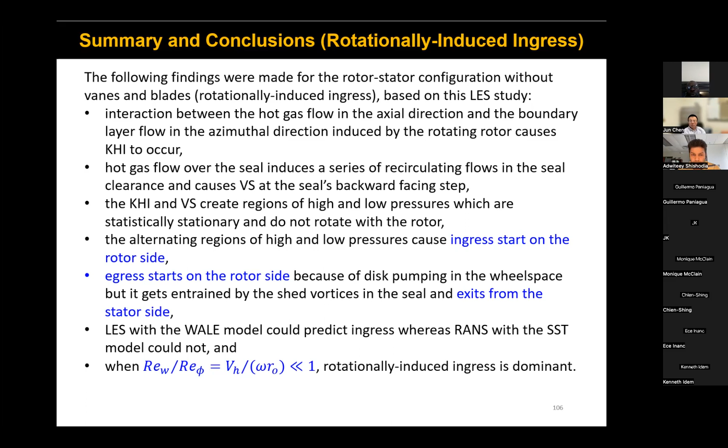Now the alternating regions of high and low pressure then cause ingress to start on the rotor side for rotationally induced ingress. And then egress starts on the rotor side and then exits from the stator side because it gets entrained by the shed vortices. Also, LES with WALE model is able to accurately predict ingress, whereas RANS with SST model could not. And also, when Re_w over Re_phi is much less than 1, rotationally induced ingress is dominant.

This is for rotationally induced ingress. And then for ingress induced by stator vanes, both LES based on the WALE model and the steady RANS based on the SST model can accurately predict the coefficient of pressure on the stator platform. However, LES could accurately predict ingress, but steady RANS cannot. Therefore, CP is not a correct predictor of ingress.

Now, LES predicts higher values of TKE in the annulus and the seal region than RANS. So for RANS models to be able to predict ingress, they must be corrected to produce higher levels of turbulence in the seal region. The stator vanes induce higher TKEs on its own in the annulus and seal regions. Also, the higher TKE values predicted by LES when there are vanes correspond to the higher pressure drops predicted by LES. And we should also show the mechanism and flow trajectory of ingress and egress induced by stator vanes.

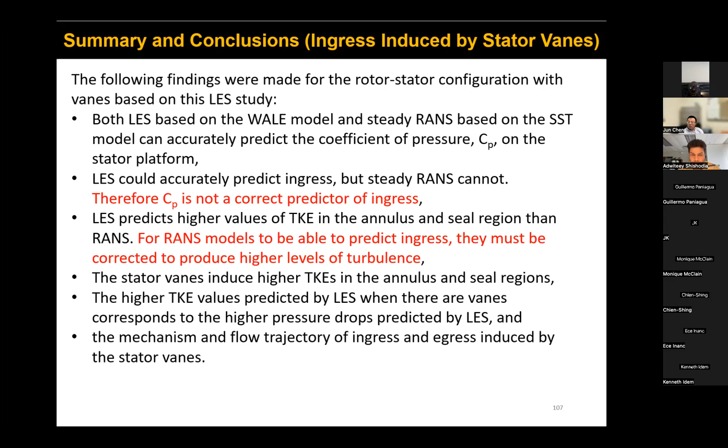So that is my talk for today. Thank you.

I know we're all online, but I'm going to clap right here, every time. Okay, so I'm going to open up—Sabina, maybe let's not share your screen for a minute. We can see everybody, but then we can open the screen as needed.